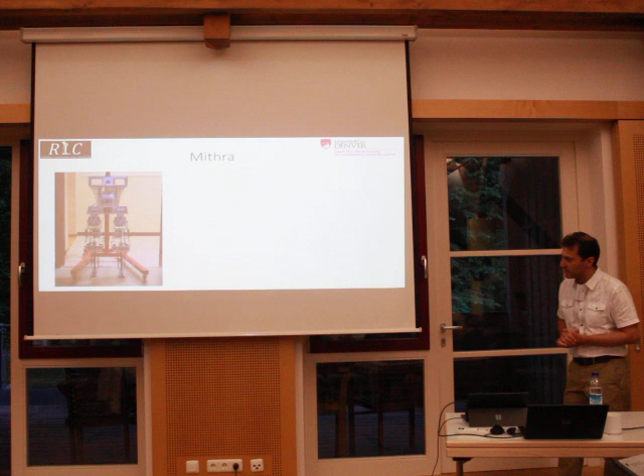This is Mithra, our humanoid robot that we have been working on for the past 3 years or so at University of Denver. I showed the design last year, so just a quick overview of what we did.

It was intended to be designed with height, weight, joint range of motion, and limb length similar to humans, because we are interested in human locomotion. We also tried to have mass distribution and inertias in the sagittal plane similar to those of humans, which is different from what's popular in the community now, using very light legs, since that obviously simplifies control greatly. So we purposefully made our job harder by having legs with non-negligible mass and inertia, like humans.

That was important for us because attributes such as the initiation of the swing phase through propulsion of the thigh depend on the inertia of the thigh. If your thigh is massless, you cannot do that. For that, I refer to Daniel Renjewski, and I'll go further into discussion if you want.

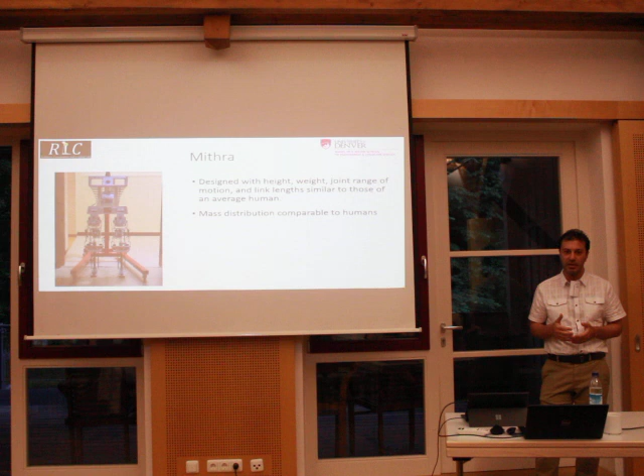Or more importantly, perhaps, the energy that the shank takes from gravity during the swing. The shank can freely swing in humans and harvest energy from gravity. Again, if the shank doesn't have mass and inertia, it can't do that. So human-like walking, to a great extent, relies on the dynamic attributes of the limbs.

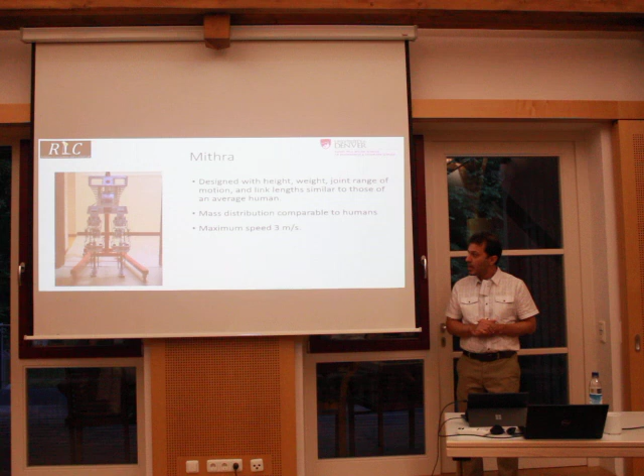So we designed the robot for a maximum speed of 3 meters per second. The actuators were carefully designed to provide the necessary torque and speed for that, and the structure was also designed to withstand the forces.

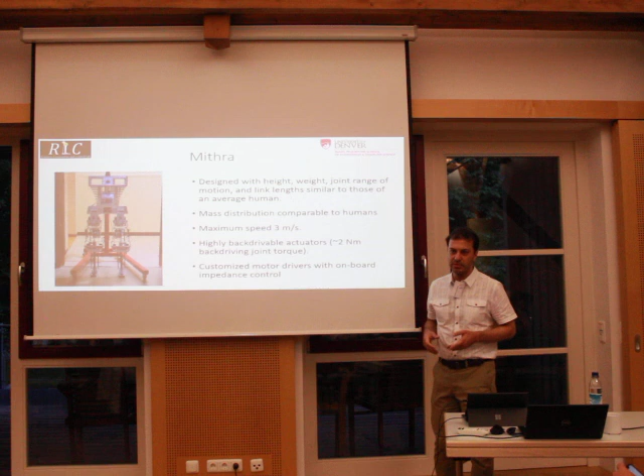Getting to the main topic, it has highly backdrivable actuators, with friction of perhaps less than 2 Newton-meters. It's very easy to move the actuators around, which should be useful for the things we try to accomplish. Also, to take advantage of this backdrivability, one of the things we did was customize the motor driver. Motor drivers usually have position mode, torque mode, and speed mode, so we added another mode to the driver: impedance mode. We do impedance control onboard at higher frequency to get better results.

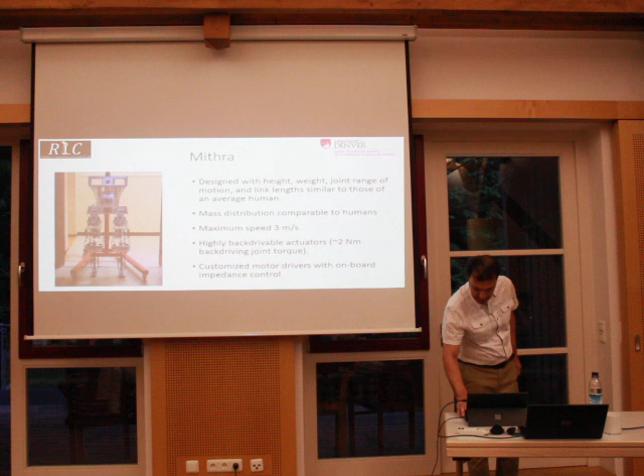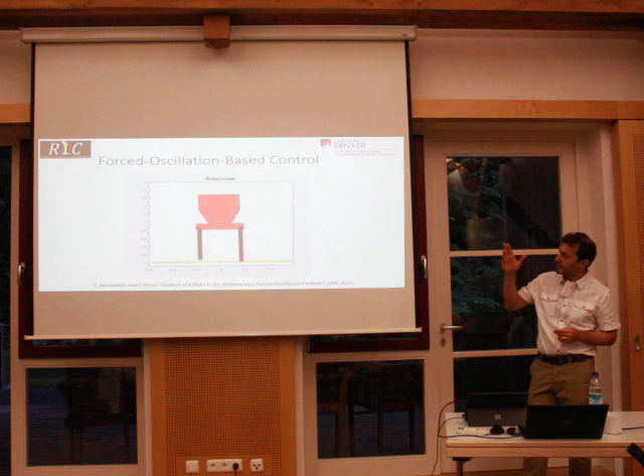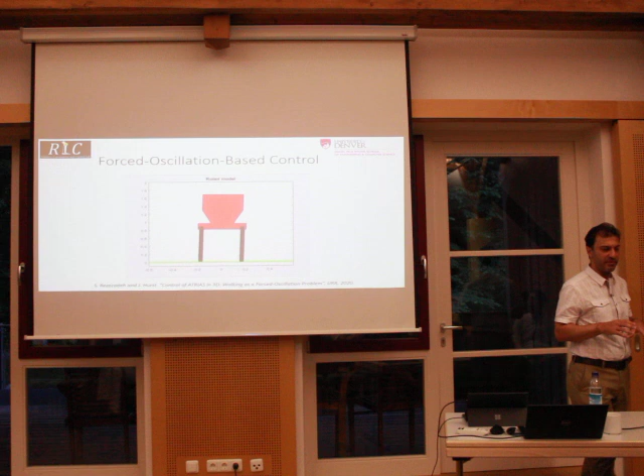So the controller we start with is this forced-oscillation-based control. In a lot of robots today, especially ones that move more dynamically, you see this kind of stomping on the ground, and that's because of this forced-oscillation-based scheme. It's like a clock or time-based feed-forward input that leads to that stamping, and if you design it correctly, it leads to very highly stable locomotion.

Years ago, I did this at Oregon State on ATRIAS. Notice how it stamps its legs on the ground, and it can blindly go over and come down from a pretty large obstacle. This scheme is very useful because forced oscillation is a very robust scheme, it always converges to the same thing. I'll get back to this later.

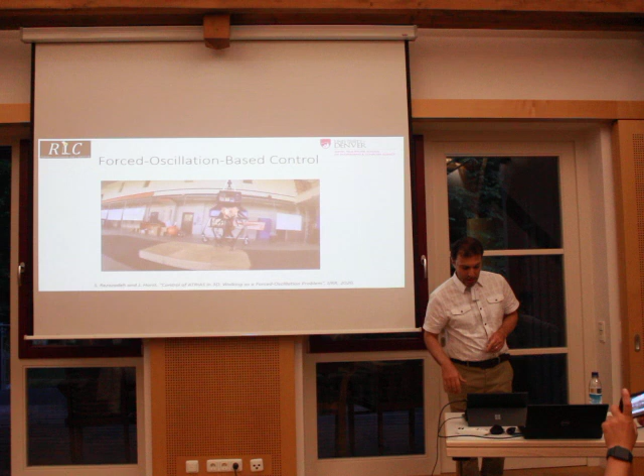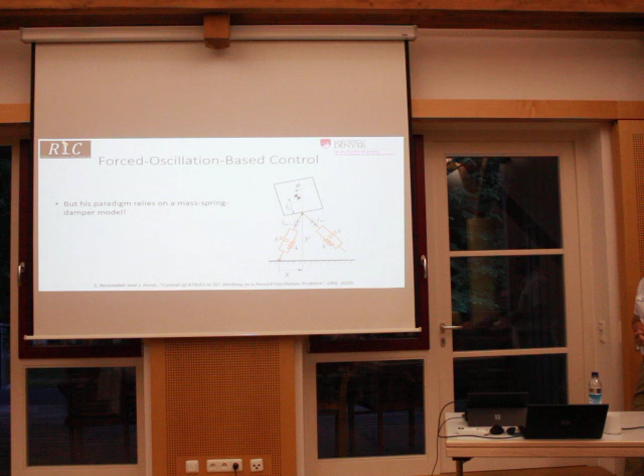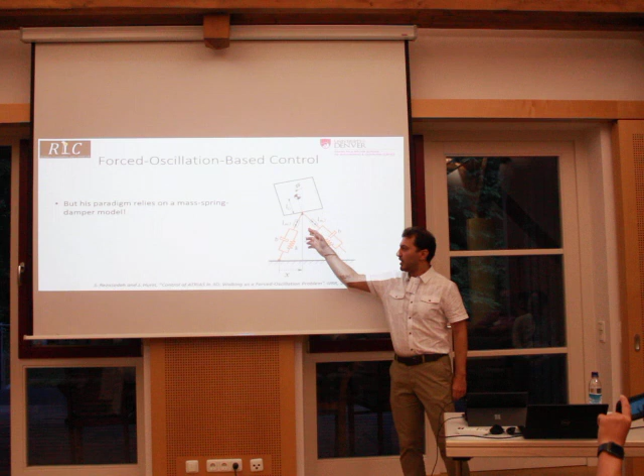But the thing this control relies on is that the model is based on mass, spring, and damper. So the legs act as spring and damper, and ATRIAS has physical springs, linear springs, that could satisfy the conditions of this model. So these actuators in that direction are the ones that cause that stamping on the ground in forced-oscillation-based control.

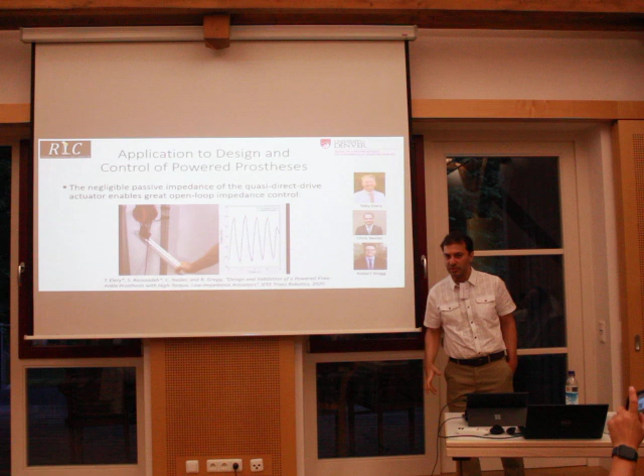Another work I did at Bobby Gregg's lab was this back-drivable actuator that could do open-loop impedance control very effectively. As you see, I'm moving the actuator, and the load cell measures it. Here we compare the result from the load cell to the response of a real mass spring damper. As you can see, the open loop impedance control is perfect. The load cell is just measuring and verifying the concept, it's not a closed loop based on load cell. So it shows that if you have enough back-drivability, you can do very good impedance control.

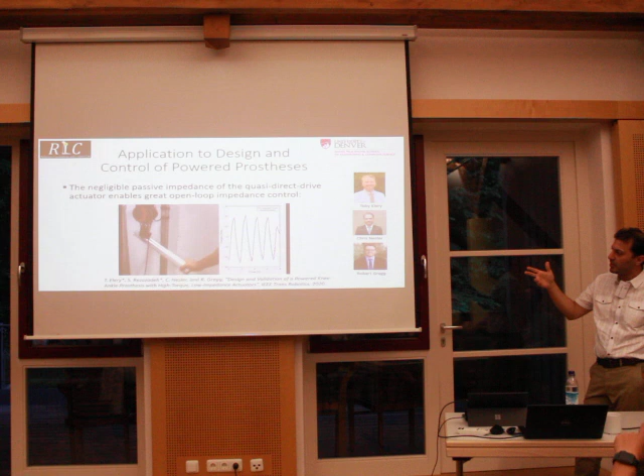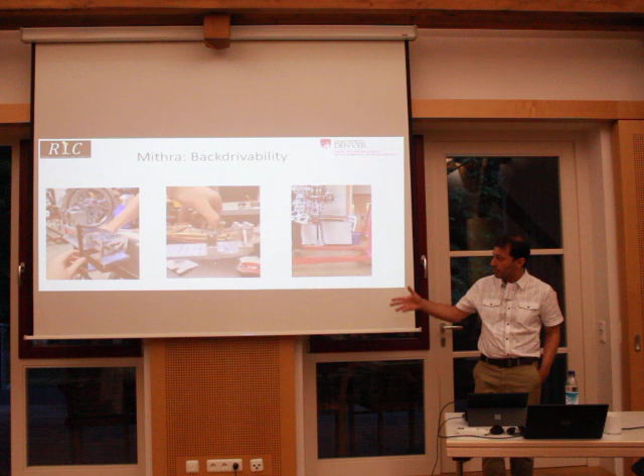This one wasn't even onboard impedance control, it was offboard. And Mithra has back-drivability even better than this prosthetic leg. These videos show some examples of different parts of Mithra, how back-drivable and low friction they are. Especially in the right video, as you see, the motor is off, and the knee can do very well the free swing, the same way you see in humans. That's something important for us.

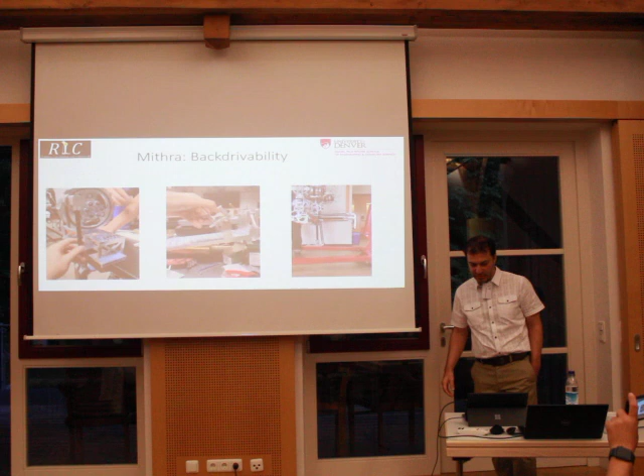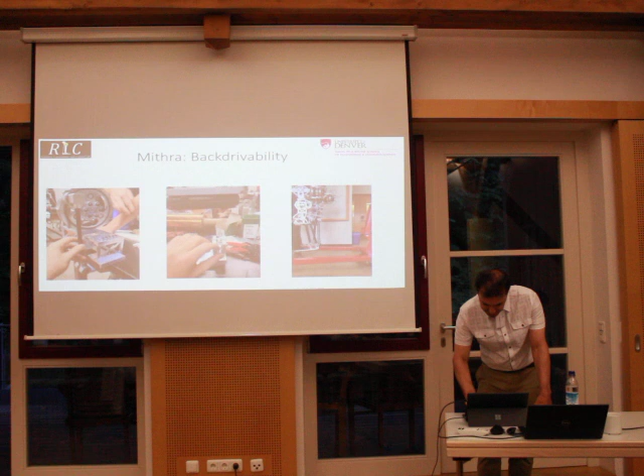Perhaps even more interesting, my favorite video of back-drivability is this one. This was an old video, perhaps a little after last year's Dynamic Walking conference. We were testing the robot after finishing building it, testing the joints one by one by giving sinusoidal waves.

If you look at this, you just see both legs moving in opposite phases. I kind of yelled at my grad student because I told him to test the joints one by one first, and I thought he was trying to impress me or something. He said there's only one joint working, and then I noticed the other one is just moving by the reaction torque of the other leg. It's so back-drivable that you can hardly notice which one is being actuated and which one is just moving passively.

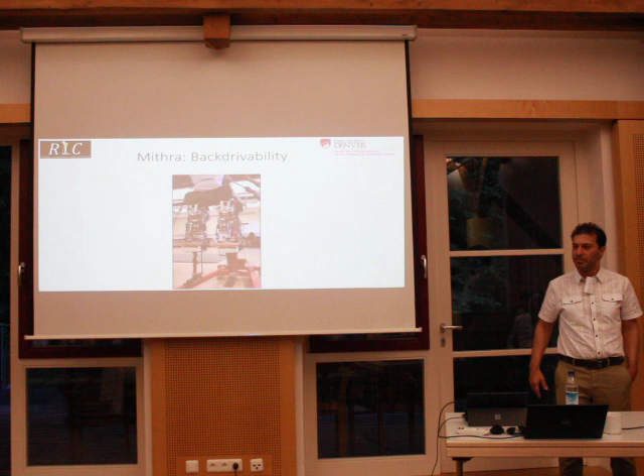So back-drivability is great. We can do impedance control, and we should be able to accomplish whatever we're trying to using that force-based oscillation scheme. Right? Right.

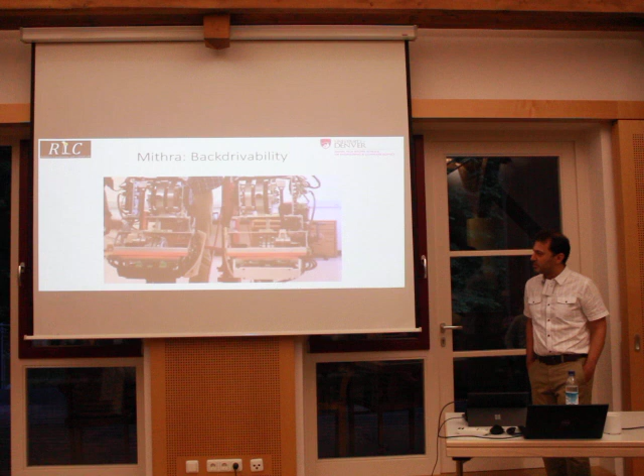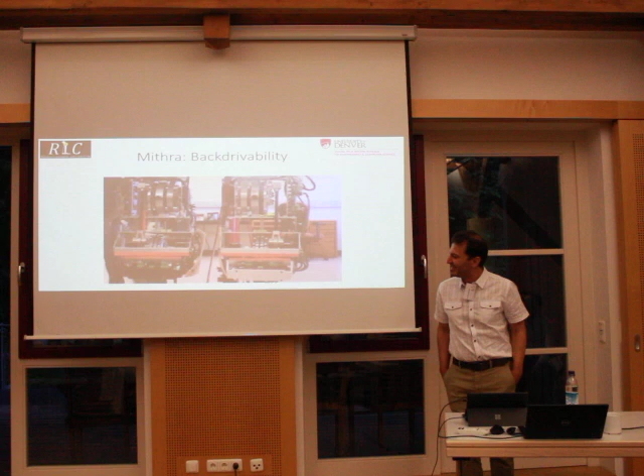So the first thing we did, seriously, this thing happens. So yeah, that was pretty spectacular.

And, if you want to see the zoomed out version, you see how the grad students freaked out. It's like this.

Okay, so thank you. It took us a while to figure out what's going on here. First we suspected that because we were testing for a rather long time, the temperature had gone up, but then we investigated and saw that wasn't the case.

Finally we found out that the regeneration current is actually much more than we expected. I've had quite a few experiences with regeneration, and regeneration efficiency was always pretty low, so a little bit of current goes back to the battery or other motors. But in our case, because of very low friction and the pretty high inertia of the leg segments, even for small velocities we get a lot of regeneration current. That led us to add a lot of safety features when stopping the leg, so the regeneration current doesn't go where it shouldn't.

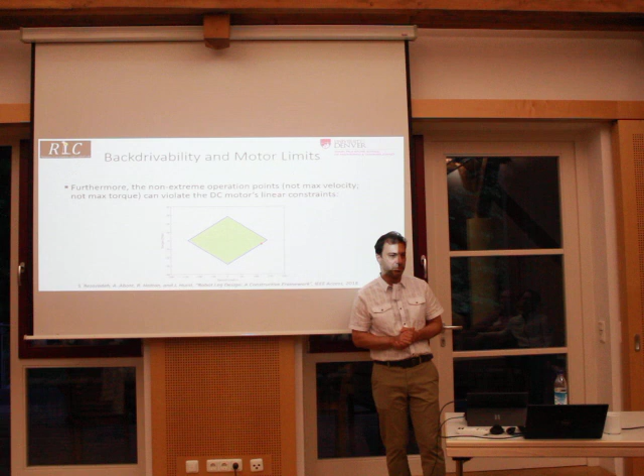We investigated again and saw that what was happening was that we were commanding the current, but the measured current of the driver is much lower than that. We realized we forgot about these diamond plots, which we'd actually considered very carefully in design for the gait cycles at maximum running speed that was our goal. But in our safety module, we didn't consider it.

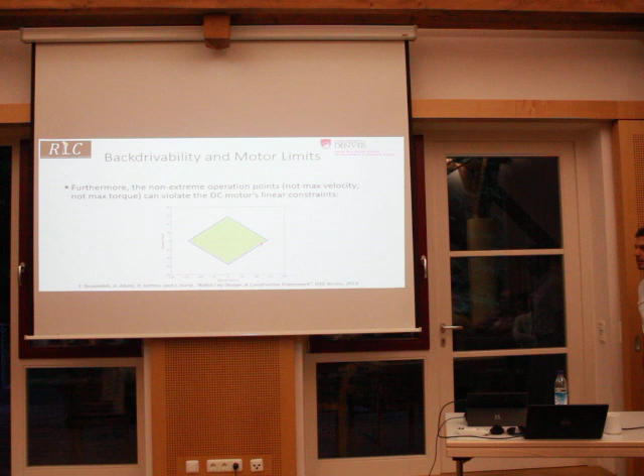So what does it say? It says that, for example, the maximum torque reported in a datasheet is either the top of this diamond for this particular motor, 30 newton-meters, or the maximum current your power electronics can handle, or your demagnetization torque. But your maximum current and maximum torque reduce with the speed of the motor. So if the speed is high, your maximum torque is low. For example, at this red dot, 100 radians per second, or almost 1,000 RPM, a pretty normal speed for a motor, you only have about 10 newton-meters, much lower than your peak torque.

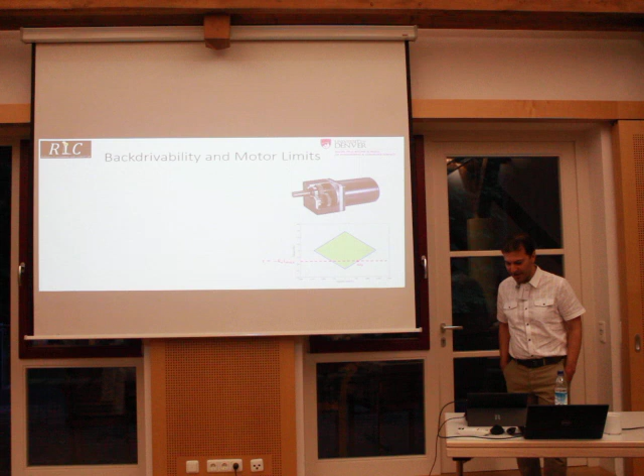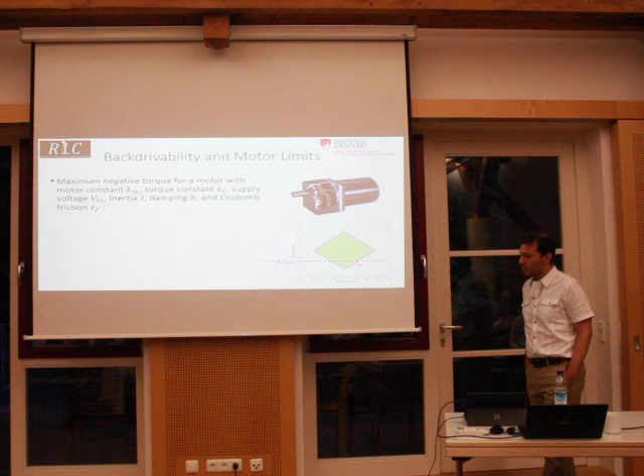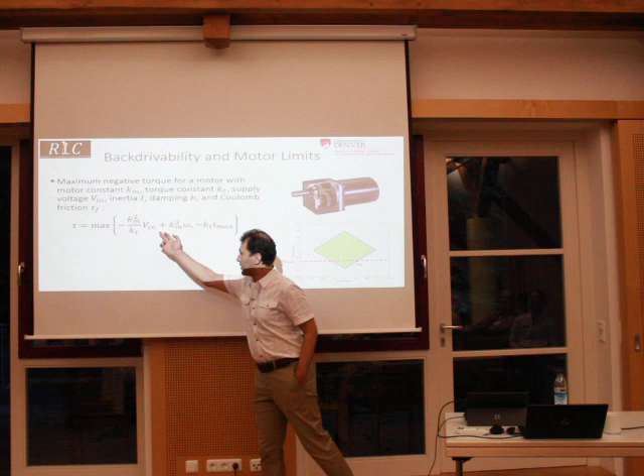So we tried to look into the dynamics of the motor more closely and found that it was pretty easy. If you have a motor with these parameters, your maximum torque, shown by this diamond, is either these lines or Kt times Imax, which comes from the demagnetization or maximum current, whichever is lower.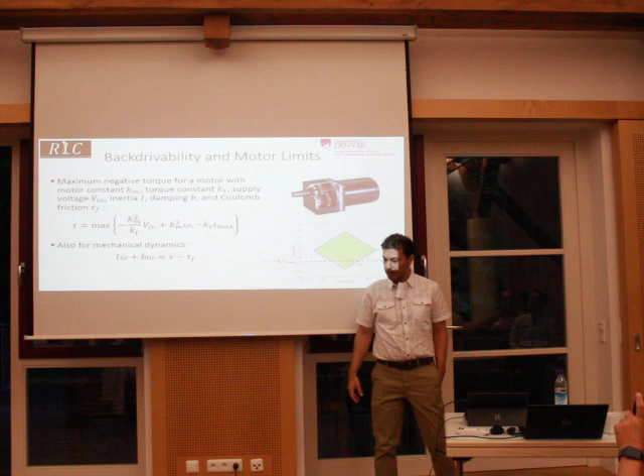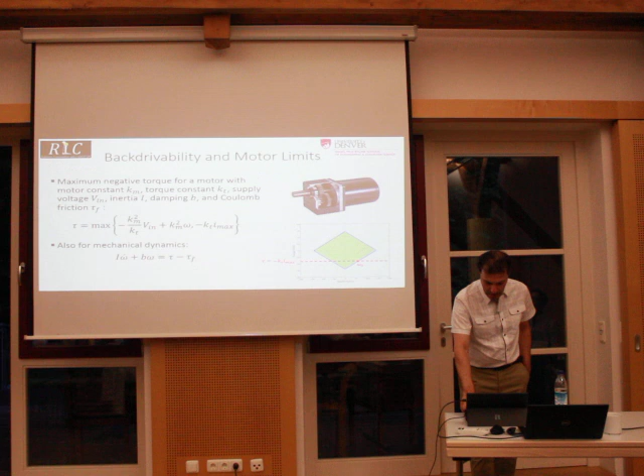And from the dynamics of the motor itself, you have something like this, where I can be the average inertia you have in that configuration, from the limb added to the reflected inertia of the motor. So this is a linear differential equation. You can solve it and get this exponential form for omega, where you switch from this limit to that limit.

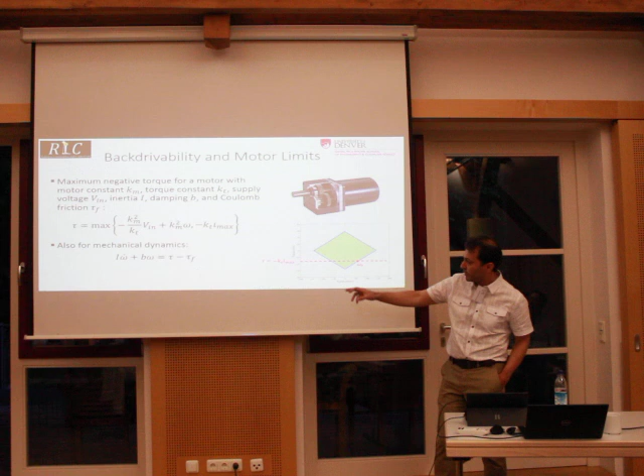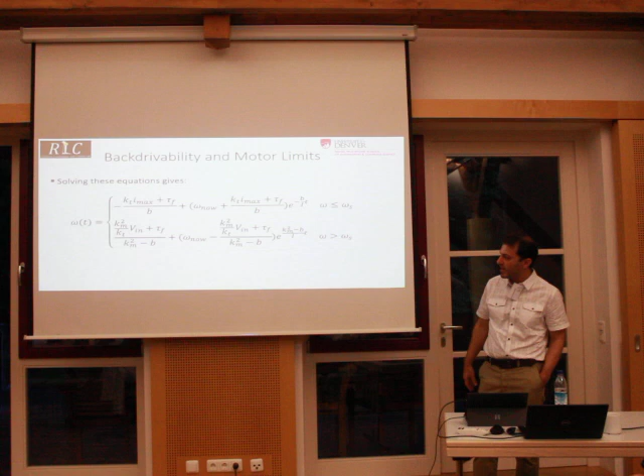And you get something like this, so you can predict what will be going on if you apply your maximum available torque to the system, to the velocity of the motor. Then you can integrate it to get your theta, your angle, which should be far enough from your joint limits. So basically, at the point that you make your omega zero, stopping the system, you should still be having some room from your joint limits.

So that would be the condition when the safety module is activated and applies the maximum available torque, with some margin from the joint limits.

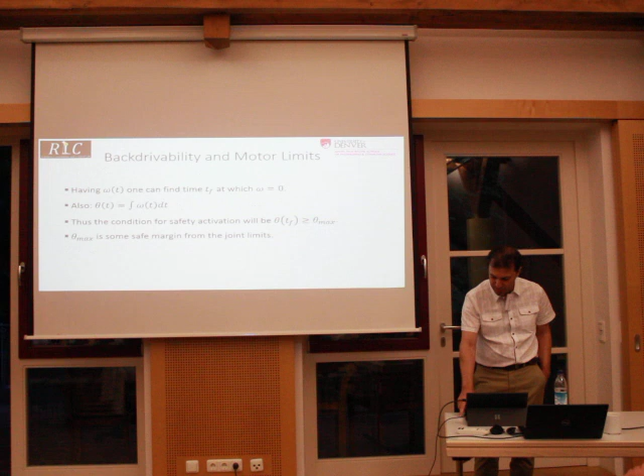So it seems that these additional modules we added to the safety of the robot are now getting the robot working better. So we return to that forced oscillation scheme. The first thing we tried just recently was control of the vertical direction. Why vertical direction? Because I believe that in walking, in locomotion, the vertical direction, the direction of gravity, is the most important one.

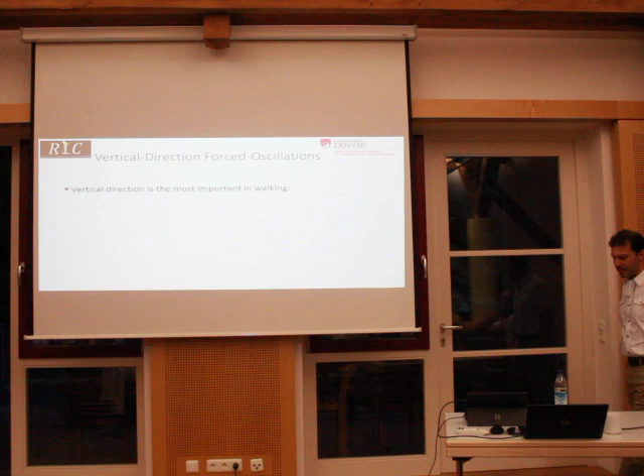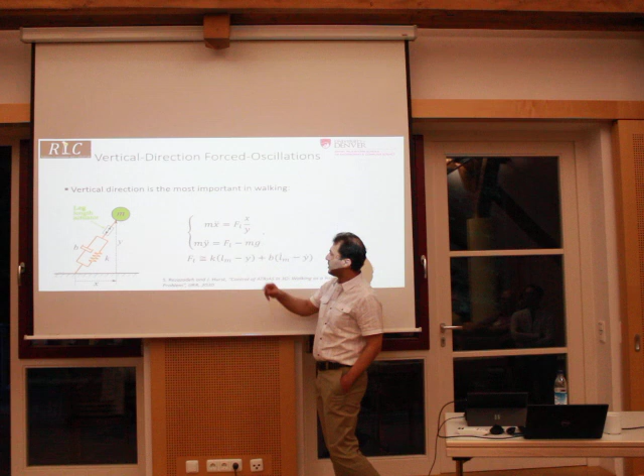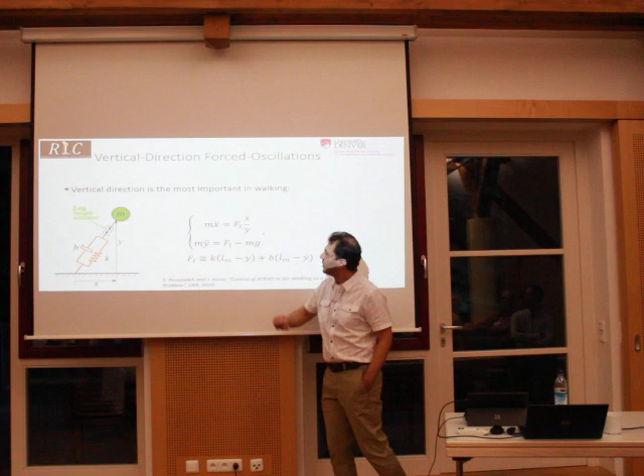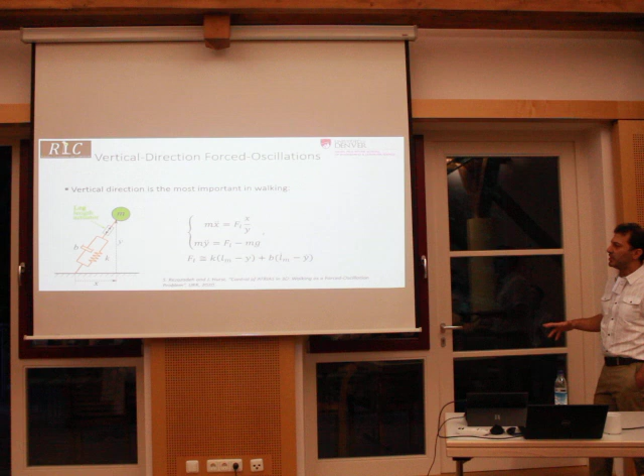So if you design your leg force something like this, your vertical direction will have its own oscillation independent of whatever happens in the horizontal plane, and its stability will trickle down to the horizontal plane, built by the controller that you can add for the horizontal plane.

If you want to talk in terms of the Poincare map, the Jacobian of the Poincare map will be triangular, and the stability of the vertical direction and horizontal direction will be independent of each other, which makes it a very powerful paradigm. That's why I'm saying vertical direction is the most important direction for control of your robots. If you do it well in vertical direction, horizontal direction will be pretty much just foot placement.

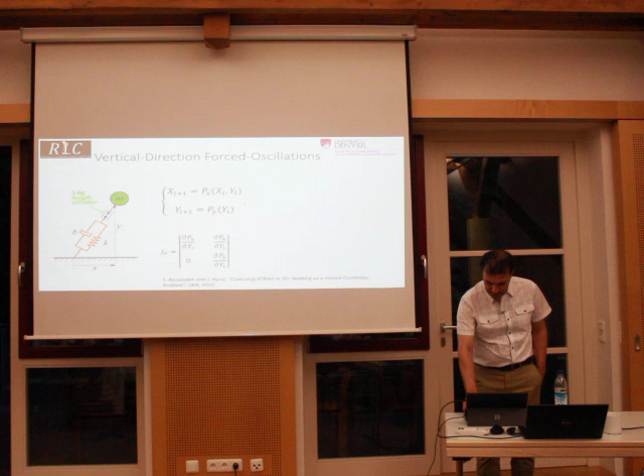That has a different reason, because we have issues right now with estimation of the velocity of the center of mass, which is not related to this controller. Hopefully we can fix that velocity of center of mass soon and get the foot placement in order, and we'll get the robot to walk.

In simulation it works well, because in simulation your estimation of center of mass is perfect. But in reality, I don't know why, the velocity of center of mass sometimes goes too high, so these weird foot placements occur.

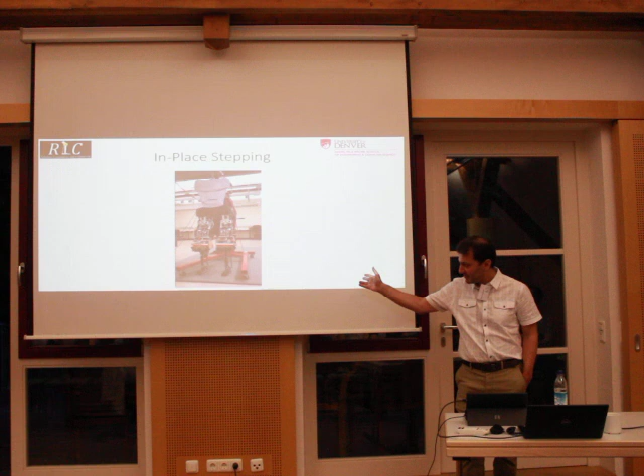So much? Yes. How many more slides? One.

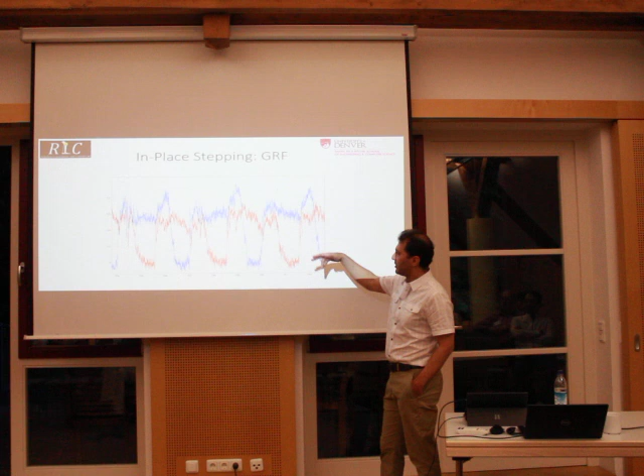Okay, to show what's happening in the vertical direction, this is the ground reaction force of the two legs. As you see, one leg has a smaller force than the other because the robot drifts to one way, so the chain kind of pulls the robot. But the other leg is pretty much doing it freely and taking all the mass of the robot, all the ground reaction force.

And it's interesting that it's kind of a double hump, which is standard for spring mass walking, and as opposed to inverted pendulum, as Geyer has shown.